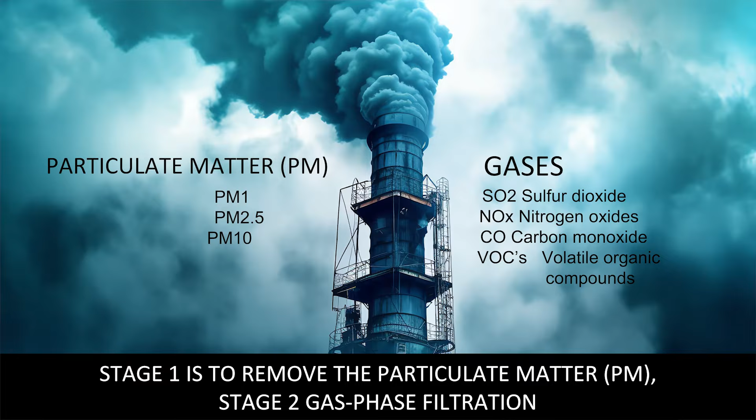With regards to air pollution, if I go down to the basics, we need to understand that there's two components in the smoke that comes out of those industrial chimneys. You have particulate matter and then you have the gases. Now, a lot of people are brandishing these terms around like global warming, climate change, greenhouse gases, and carbon capture. And while those are important and they are to be solved, we still maintain that the first primary problem is what is known as particulate matter.

Now, particulate matter is generally the stuff that you're going to visibly see. Now, that is step one. In our mind, there is enough scientific proof that you cannot solve the gases until we deal with the particulate matter. And that's what AirCure is about. That's our focus, to radically improve or reduce the particulate matter before we get to the gas phase filtration.

We believe in disruptive innovation. Disruptive means not just a new label, a new change, a little addition. We're talking about something that is going to be like candles to electricity, horse and cart to cars, film to digital, cell phones to smartphones. This is almost like setting fire to the existing in the hope of advancement.

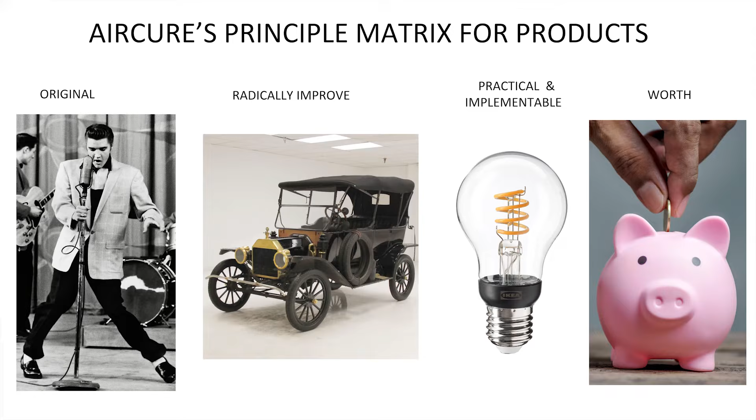That's what's called disruptive. AirCure has a product matrix that we try and filter all our products through. They need to be original, they need to make a radical change, they need to be implementable, and they also need to show their worth. If you can't do that, you're going to fail. So every one of our products goes through this matrix.

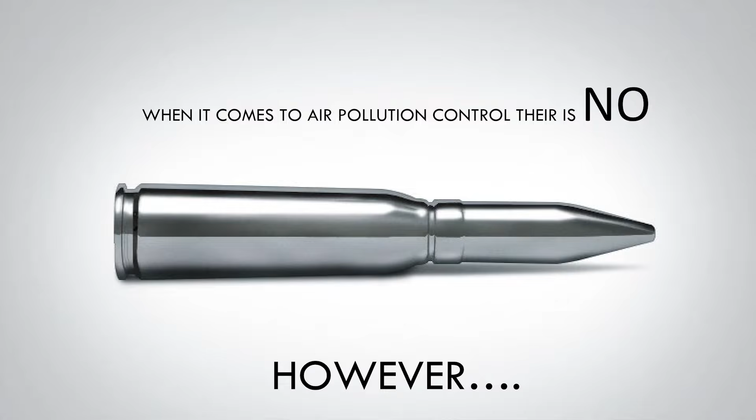When it comes to air pollution control, they say there's no silver bullet. However, we have 3 revolutionary products that we think are going to make a substantial difference. The first is called a Cycloduct, the second is Cyclo grit, and the third is Baghouse SC. The first 2 products are what we would call prefiltration, whereas the last product is a final filter, being the Baghouse.

What is prefiltration? In military terms, it's like sending in the troops. So the army, the Marines, etc., they take the hits while the king is in his counting house counting out his money. So as in chess, all the pieces are expendable, except we've got to protect the king.

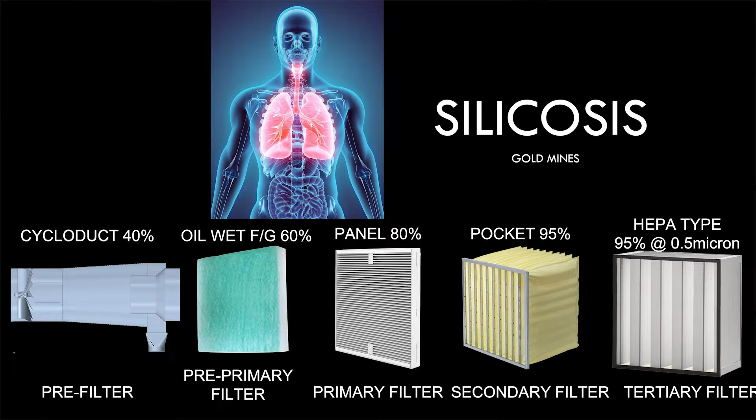We learned this years ago when we were developing filter systems for the mines. They had a terrible disease called silicosis, which is a lung disease from silica sand. And so we had this issue with really submicron sized particles getting down into the deeper parts of the lungs.

So when you design a filter system, you start with the end in mind. And the beginning of the process is to start with what we call a HEPA filter. Now that is a really expensive filter, and understanding that this is a working mine, it's hard to imagine putting in such an expensive filter. So we developed a multi-stage filter system where we had a pocket filter, a panel filter, and in front of that a fiberglass pad.

These were then set up so that they were the expendable parts while protecting the final filter. And we weren't getting the life out of the filters. So like all inventions, I have a wonderful saying that necessity is the mother of all invention. So very rapidly we had to come up with a pre-filter. We didn't invent cyclonic separation.

In fact, two scientists called Christian Huygens and Isaac Newton developed the idea of centrifugal force. And they said centrifugal force is the apparent outward force on a mass when it is rotated. So that's a bit above my pay grade.

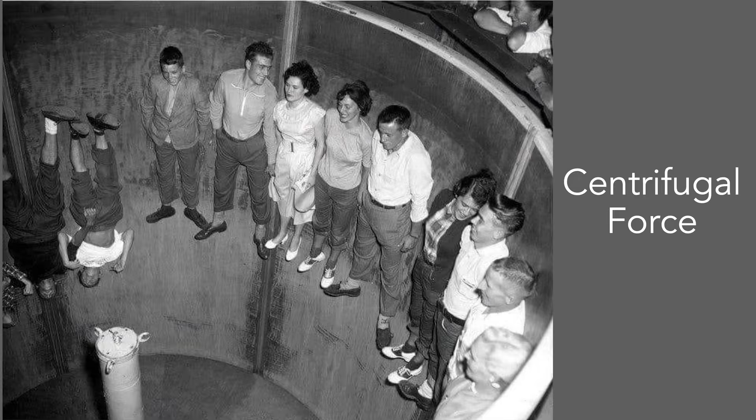And if I explain this, I go back to my childhood. I'm giving my age away, but any of you who are my age would have gone to the Rand Show in Johannesburg and found there was a ride, if you could call it a ride, called the rotor, which was essentially a big steel cylinder, and you all marched in, stood upright back to the wall, and it would start to spin, which was really fun.

And you would feel, as it went faster, the attraction onto the wall. And then they would take the floor away, which was highly amusing, and everyone thought it was funny as hell until somebody vomited. Then the audience thought that the rotor was amazing.

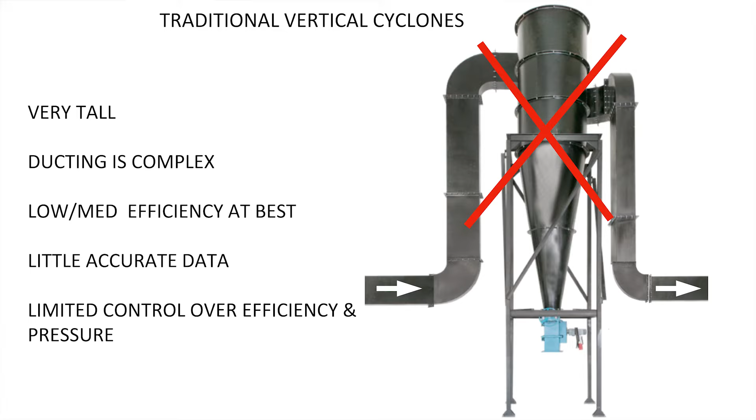The only cyclones that we could find at the time were tall vertical cyclones, and they were very tall. To duct to them and out of them was very complex. They had very little data in terms of pressure and efficiency, and they were low to medium efficiency at best. But because we were looking for a solution in mines, in the tunnels, they were disqualified on the first point. They were just too tall.

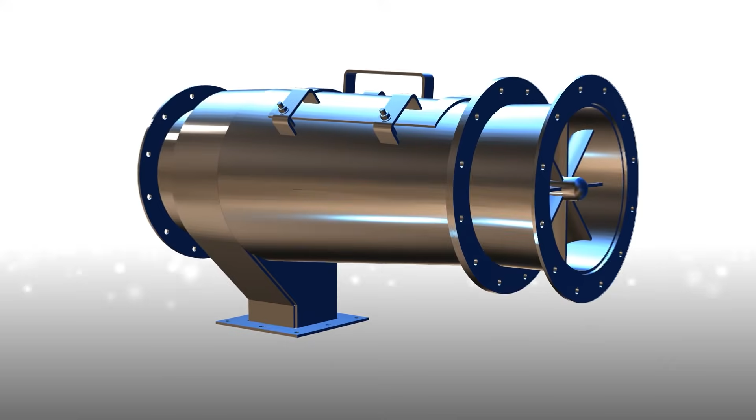Introducing the Cycloduct. This is a horizontal inline cyclone. It can be made out of any material and made to any size. It's a South African product. It's our product, and we patented this in about 70 countries around the world. Very simply, you would remove a piece of ducting.

This has three components. The one is the fixed blade. Now that creates the spin. So your airflow would go through our blade. It would then create the centrifugal force towards the outside. And then you have a vortex finder right in the center, which would then allow the cleaner air to go through and the heavier particle to drop out.

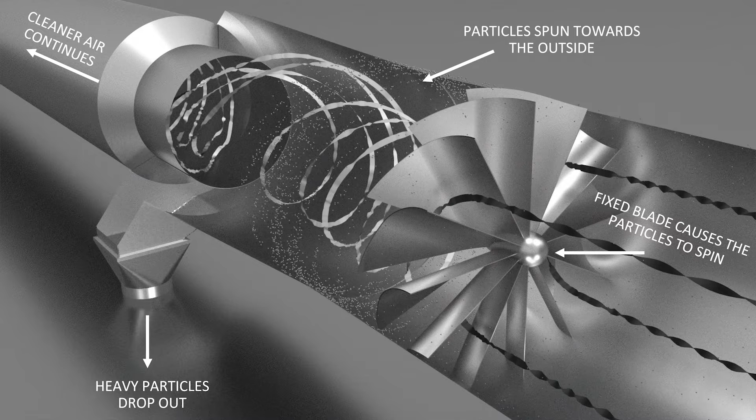As you can see from the illustration, it has a fixed blade. Now that blade has taken us something like 11 years to develop. And the pitch, the angle, the number of blades will determine the efficiency and the resistance that they create. So by changing the blade, we can determine the efficiency and the pressure drop across it.

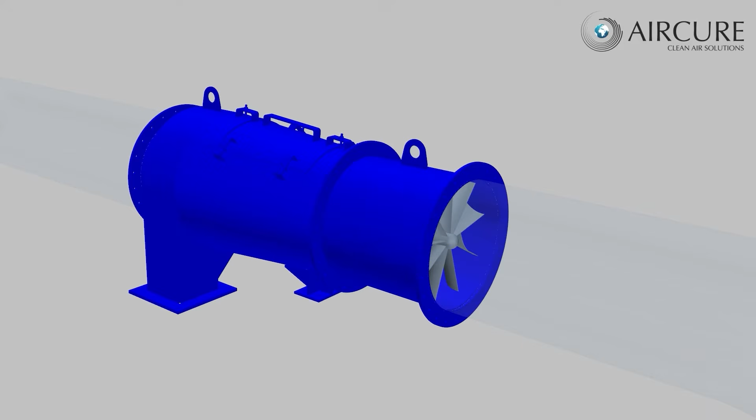The Cycloduct has an interchangeable blade, which if you choose, you could increase the efficiency by selecting a 6, 8, 10 or 12 blade. This would then give control over the efficiency plus the resistance that we can select. So we have a selection chart whereby you can easily interchange one blade for another.

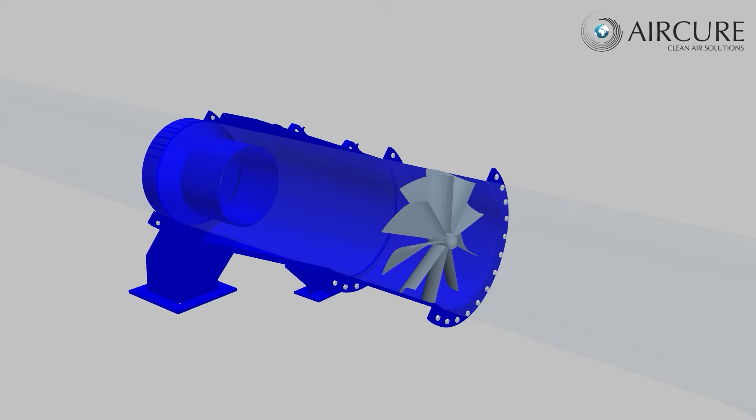Probably the best cyclone in the world. Now that's not just sales talk or me being boastful, but we've actually done extensive research around the world, and we've recognized that we have something absolutely unique in the Cycloduct. We don't build cyclones, we build smart cyclones. We can size them to any size. We can make them out of various materials. We can make them adjustable so we can set the efficiency and the pressure resistance. They can be retrofitted to virtually any filter system on the market.

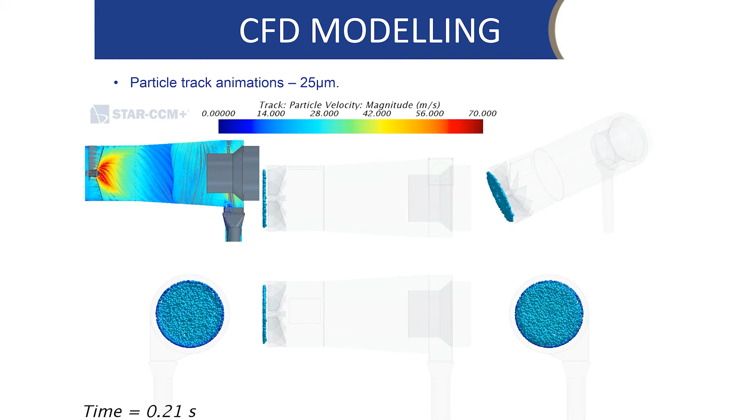And boy, have we tested them. We've tested them on CFD modeling. We've tested them in real life. And we have so many examples of just how effective these can be. CFD modeling is every product developer's dream. It's called computational fluid dynamics testing, and they essentially simulate what would happen in real life with a very high degree of accuracy. So you essentially put your product into their test bay on computer, and then you would be able to recognize what particle size you're taking out, at what velocities and what pressures.

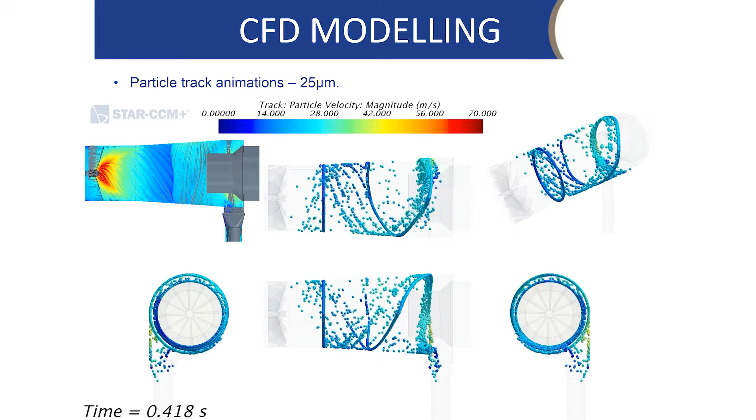And we've done up to now around about 35 different CFD models. First we did it for testing, then we did it for product development, and now we highly suggest that rather than make any product and sit on site and hold thumbs that it's going to work, we iron it out way beforehand and get the efficiencies right before we manufacture a thing.

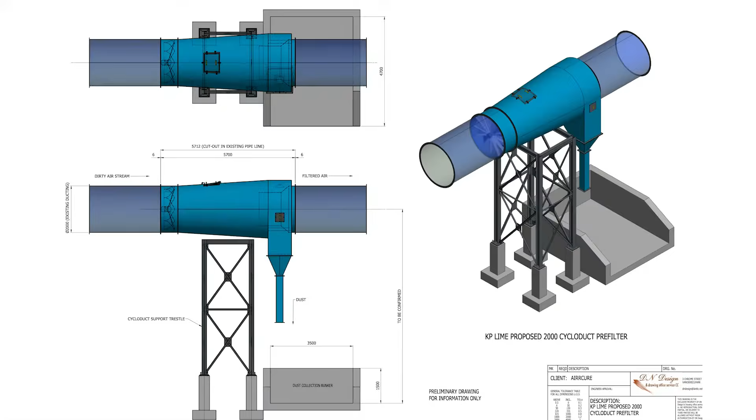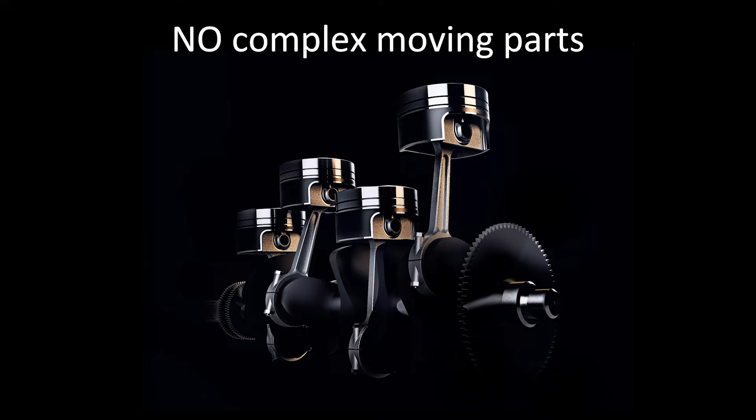As you'll see in this design, you could basically take a slice of ducting out and install this, but because this is 2 meters diameter and probably weighs about 6 tons, you would need a support structure. Some of the smaller ones you wouldn't, but in this case you would. Let me reiterate, no complex moving parts, and every maintenance guy goes, yay!

I coined a phrase, a filterless filter. Now, half of my staff thought I'd lost my mind the first time I revealed that statement, because we sell air filters. So nobody's ever going to accuse me of being a good businessman when I set fire to my filter business because I wanted to create the perfect cyclone. So why prefiltration?

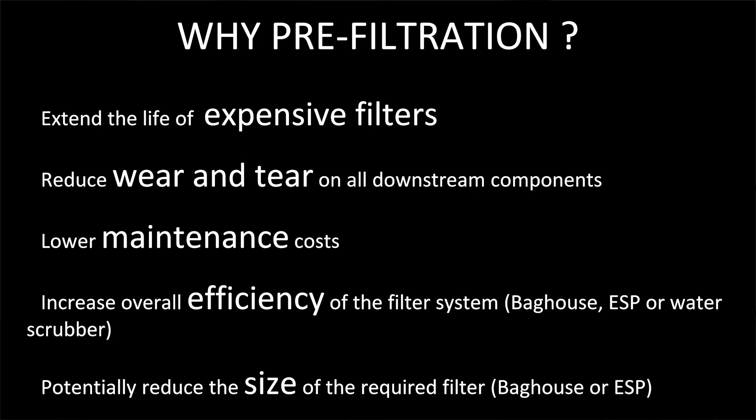Very simply, you can save on expensive filters, reduce wear and tear on all your downstream components, lower maintenance costs, and increase the overall efficiency of any filter system you have, whether it's a baghouse, an electrostatic precipitator, or water scrubber. Potentially, if you create a new system, it could be greatly sized down.

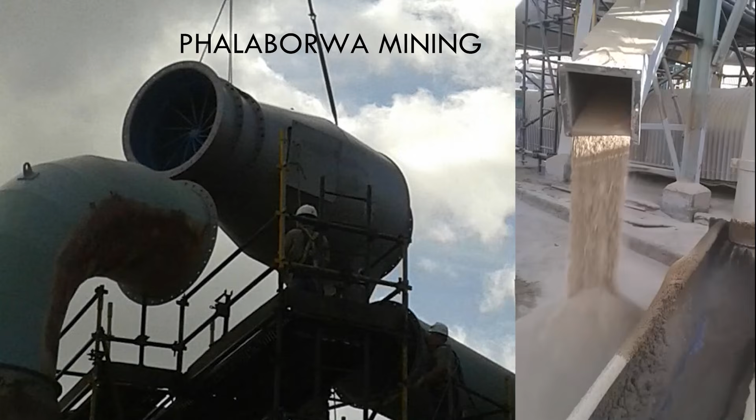While my filter division wasn't so chuffed, the mines were, because we greatly reduced the amount of replacement air filters on the units underground. But we sold hundreds of the Cycloducts, and they became the leading practice in all the gold mine tipping areas. This is a shining example of just how effective these Cycloducts can be. The amount of dust dropping out here is phenomenal, and that essentially would have gone to the baghouse.

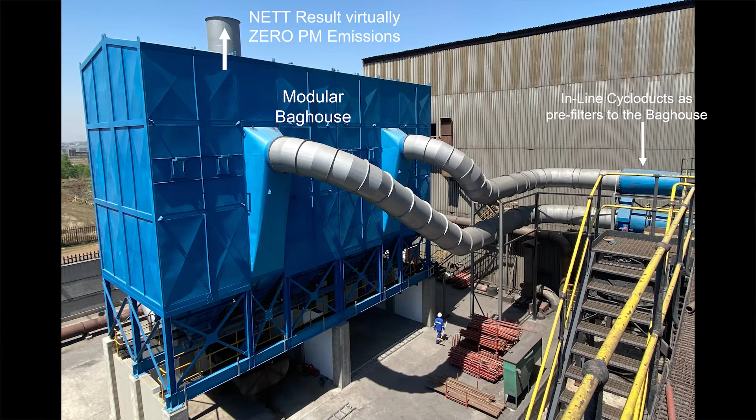We want to run through some of our latest projects with you. There's a company called Grinding Media South Africa, a subsidiary of Scaw Metals in Germiston, Johannesburg. They had in place a water scrubber using, if I'm right, about 1 million liters of water a month. They were using 500 kilowatt fans to drive the air. They had mud and slurry coming out the bottom. But the major problem they had was that they couldn't meet the particulate matter legal emission standards.

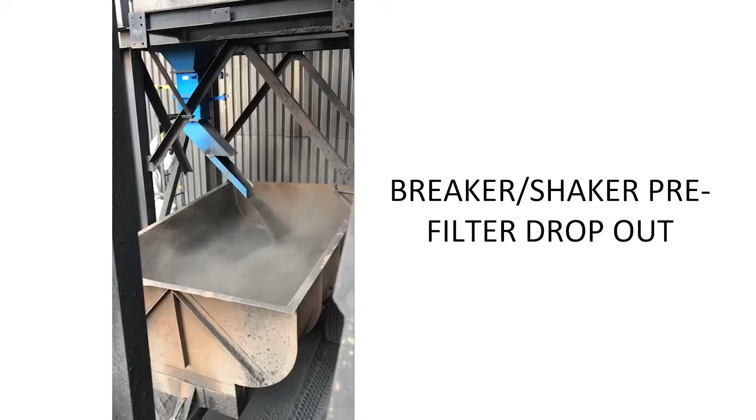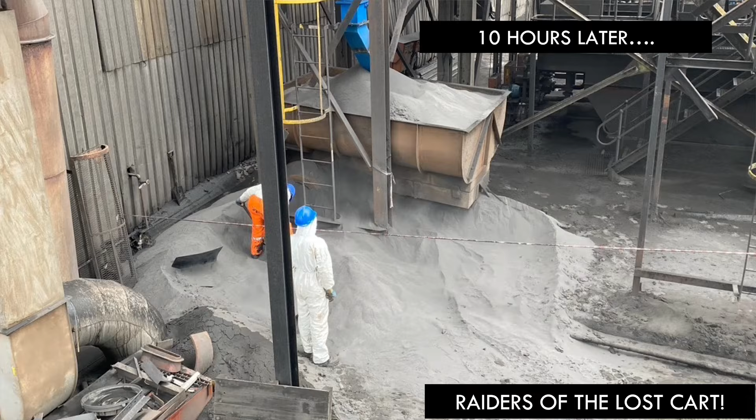We suggested they replace it with a baghouse, a modular baghouse. And in front of that, as a pre-filter, we installed these 1.5 meter diameter Cycloducts. By the morning, it was Raiders of the Lost Cart, and the amount of dust that had been dropped out by the cyclone surprised us all, but certainly we had to find an alternative way of removing the dust after that.

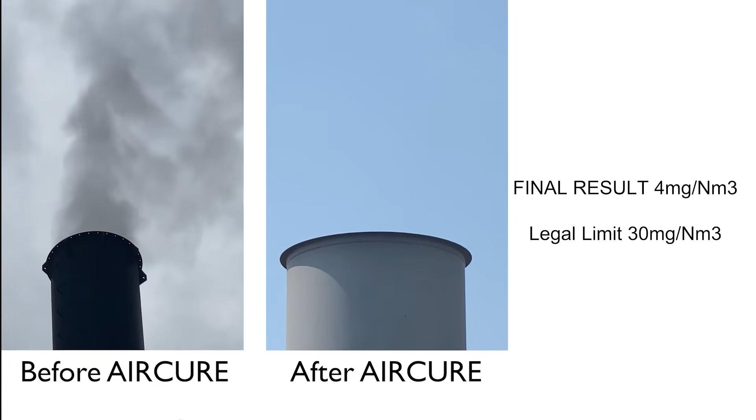The first picture is the original stack coming out of the water scrubber. The one on the right is after the baghouse, and we went from a legal limit of 100 milligrams. During the process, it was reduced to 30 milligrams. We actually achieved 4.

Sappi is a paper pulp manufacturer in KZN. They're all around the country, but they had 2 particular sites in the northern part of KZN. And they asked us a question: how far could we take cyclonic separation? It took 9 months of modeling to establish how we were going to use primarily cyclonic separation to remove about 96% of the particulate matter.

As this was the only filter between the boiler, the coal-fired boiler, and the stack, we needed to make sure that this was the most efficient cyclone we had ever made.

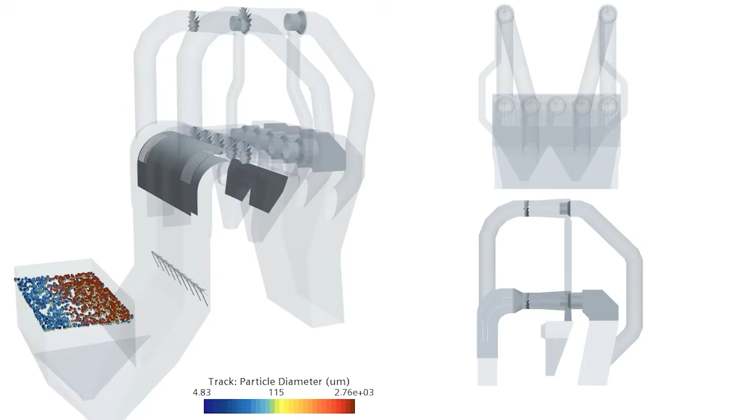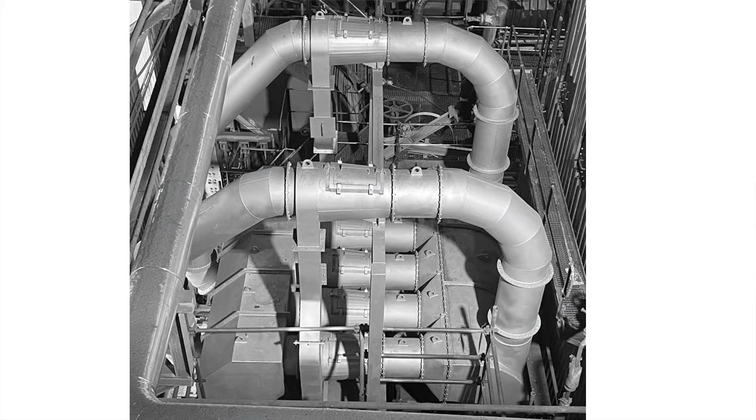In fact, it had 12 blades, and in order to assist the particles that had very little mass, the finer particles, we added a small suction to the base of the hoppers. We had very tight space constraints, and you'll see from the picture that we had 5 cyclones at the bottom and 2 at the top. That wasn't for just aesthetics, it was just because we couldn't fit them in any other way.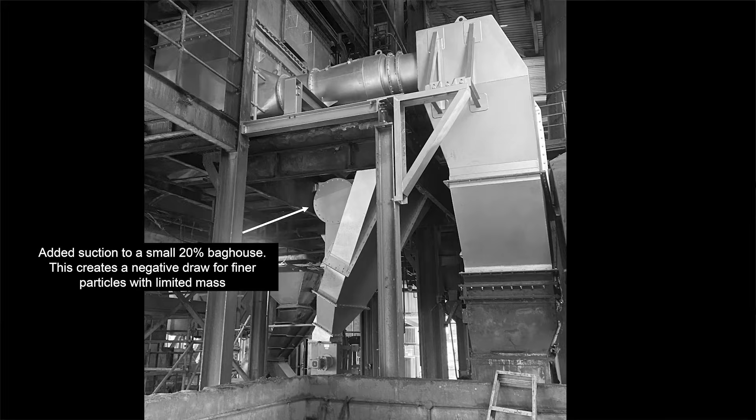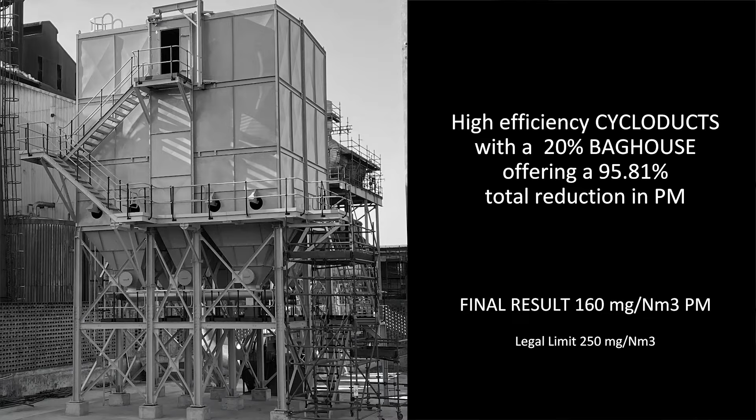As you'll see from the picture, below the Cycloducts you have a hopper where the heavy particles will drop, but we added that 20% suction, which was then taken to a small baghouse outside. The baghouse we installed was about 20% of what it would have been had we not had the Cycloducts.

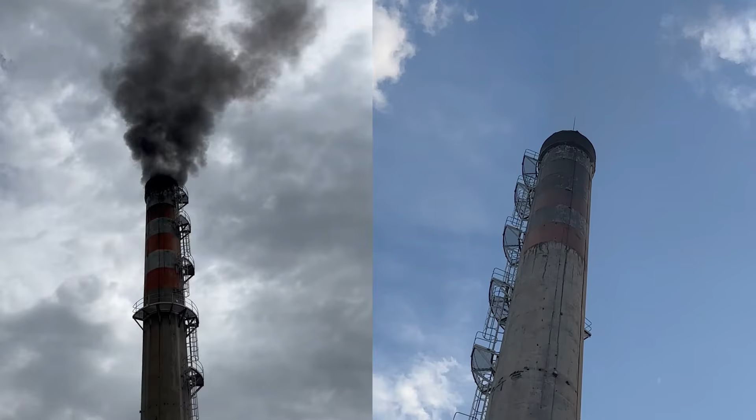This created the very first, I believe worldwide, where they have used prefiltration or cyclonic separation as the final filter, and we are so proud of the results. In fact, the legal limit was 250 milligrams per cubic meter, and we achieved no less than 160 milligrams per cubic meter. You'll see from the video how the stack emissions were absolutely immense, and post installation you can see it's chalk and cheese.

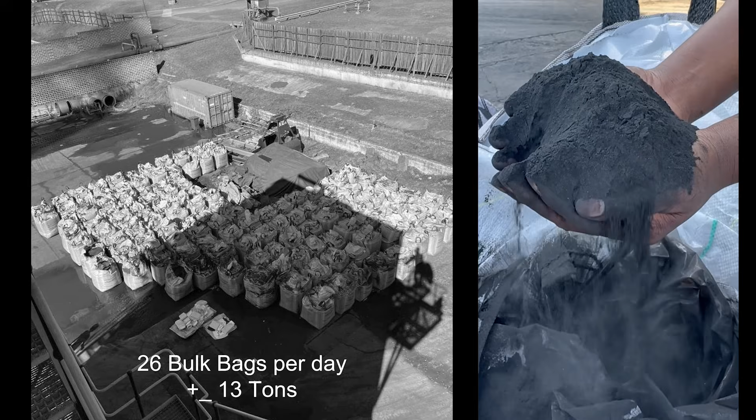Smoke is not smoke, it's actually particulate matter. And you'll see from the screen that we have about 26 bulk bags, and these are 1.2 by 1.2 by 1.2. Each holds about 600 kilograms of the finest powder you've ever seen in your life. That equates to about 13 tons of ash a day that is not going to the community.

We had a chance meeting with a Dr. Norbert Seifert, a doctor of engineering from Germany, who was in the country for a couple of days as a consultant on an upgrade of an ESP for Sasol. He'd heard about what we were doing with our Cycloduct and asked for a meeting. When we showed him what we'd been doing and what we'd achieved, he was quite intrigued.

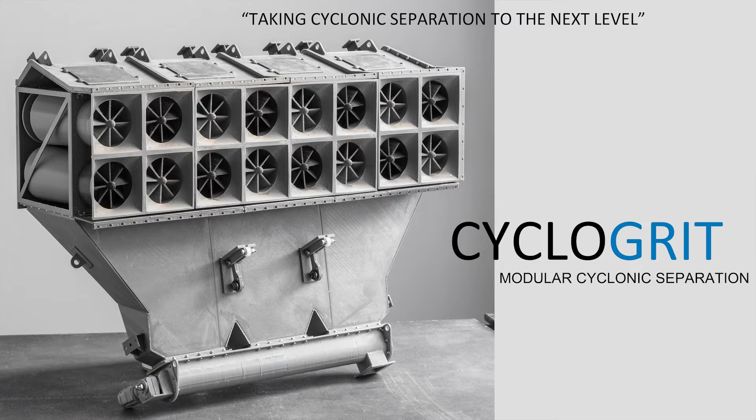He asked us if we had ever thought about making a bank of Cycloducts, given there was no space. We had a major space constraint, and he was looking for something that could slot into a rectangular duct. He then gave us 24 hours to come back with a design. Needless to say, we didn't sleep, but we came back with what we called 28 Cycloducts in a box. He was calling it a grit collector.

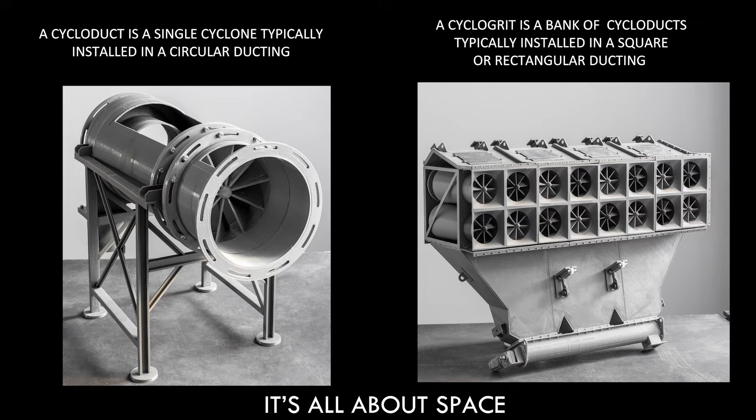A Cycloduct is a single cyclone system, whereas the Cyclogrit is a bank of Cycloducts. Dr. Seifert firmly believed that if he could remove about 40% of what he called the grit, it would extend or increase the efficiency of the overall ESP by removing some of the heavy particles.

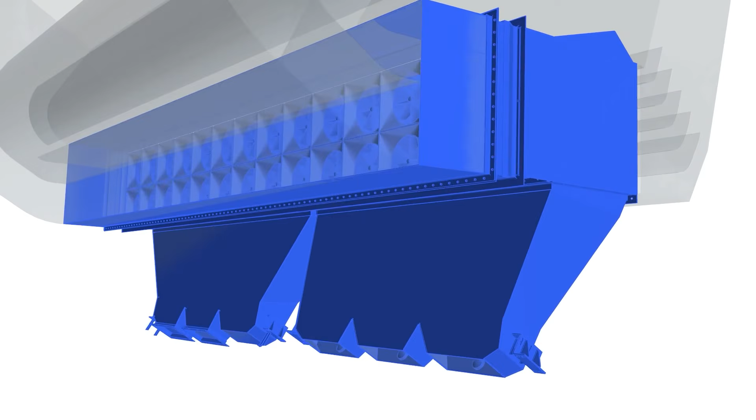The brief to us was to remove about 40% of the total ash, as they only had 600 pascals of additional pressure they could afford us on their existing ID fan. During the process of CFD modeling, we worked out every possible efficiency we could grab out of the system.

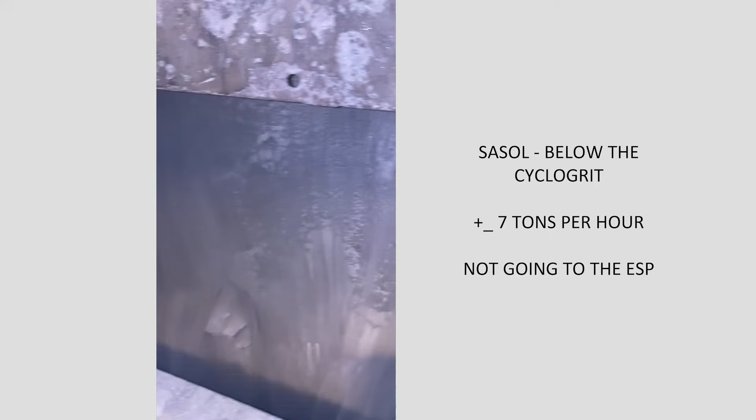We eventually landed on 56% efficiency at only a pressure drop of 450 pascals. The dropout is unbelievable. Understanding that this is just the dropout underneath the cyclones, which is about 7 tons an hour, that is not going to the ESP.

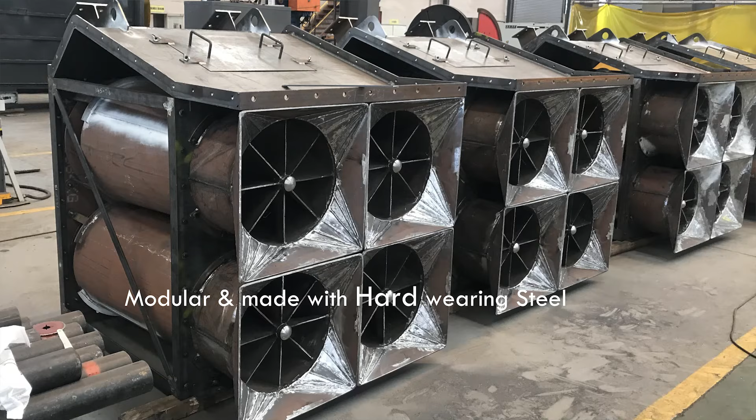The net result of the combined action of the electrostatic precipitator upgrade, which was conducted by the main contractor, we were the subcontractor on the grit collector or the prefiltration stage. In fact, the legal limit was 50, and combined we achieved below 40 milligrams per cubic meter.

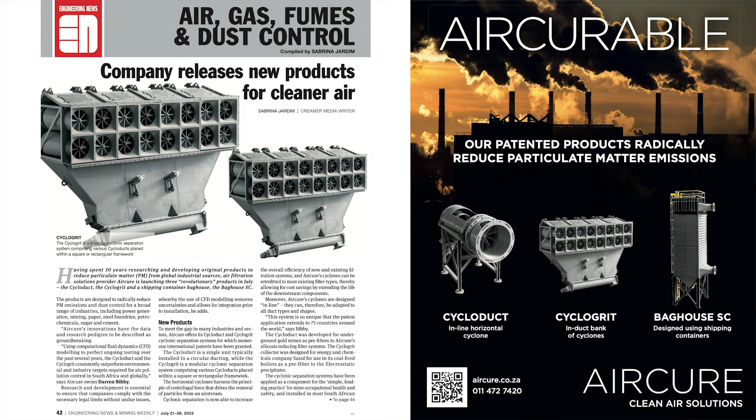We're so proud of these results that we published an article in the July 2023 Engineering News about all that we've been doing with cyclonic separation.

The third and final product is a baghouse SC. Baghouses we've been making for the last 25 years. It's the way we are constructing them out of shipping containers that makes them seriously unique. Here's our latest video of just how they work.

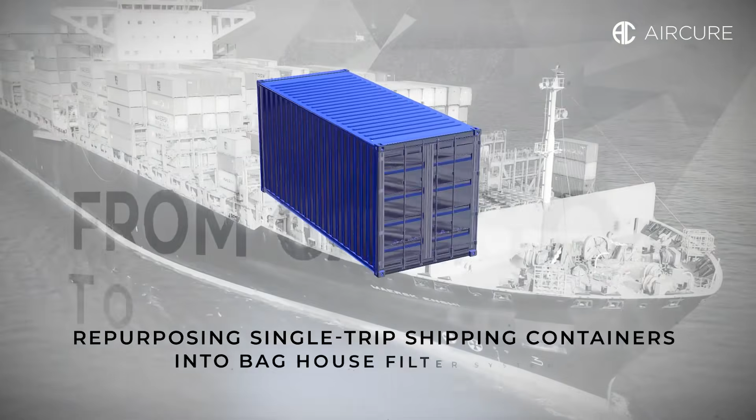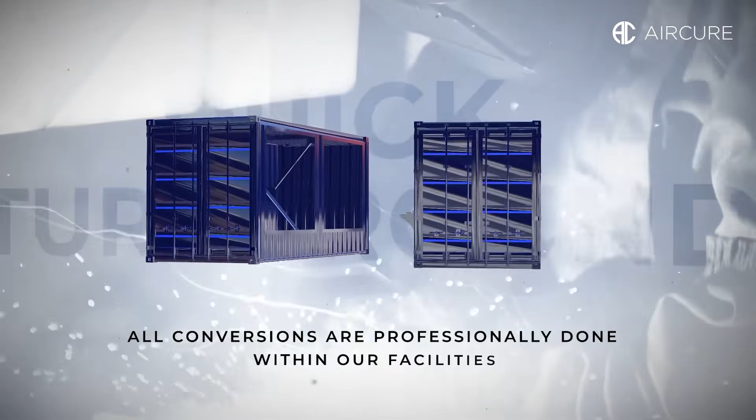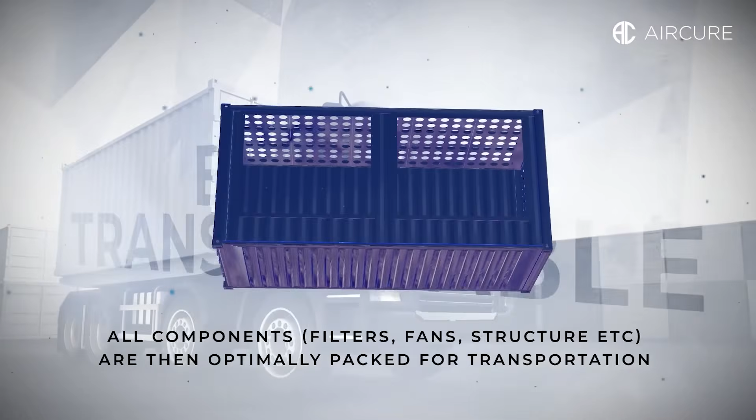Repurposing shipping containers into baghouses, taking a single trip, almost brand new, no rusty old boxes. We take them to our facility, where we do all the cutting, grinding, welding, turning them into baghouses before they leave the factory. They can then be placed onto road or rail transport and shipped anywhere in the world.

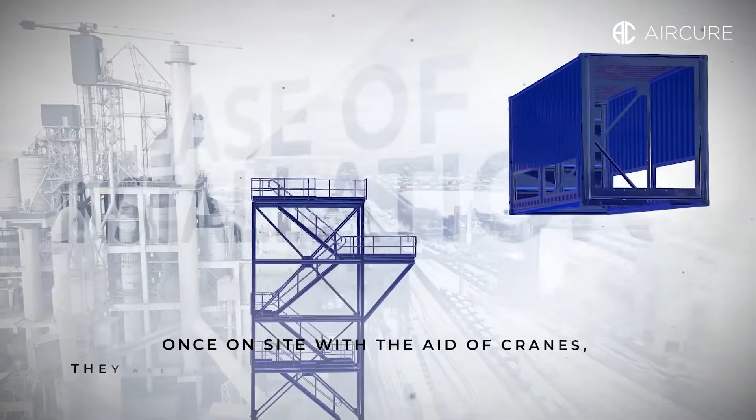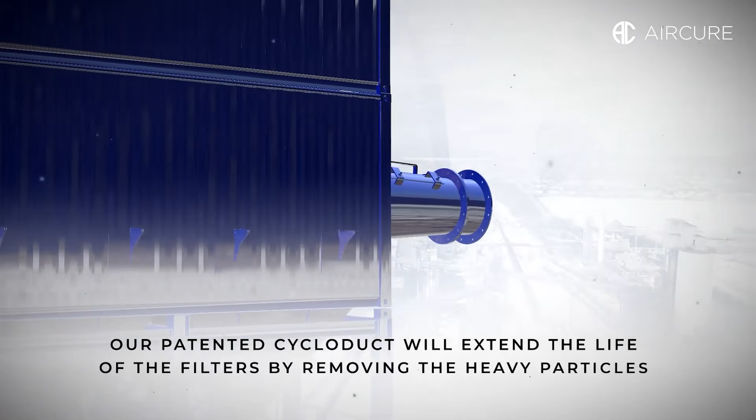All the components, loose fans, filters, etc., go inside the shipping container for transporting. With the use of cranes, this becomes child's play on site to assemble. We have a patented Cycloduct that goes onto the inlet, which is going to save and extend the life of all the filters inside.

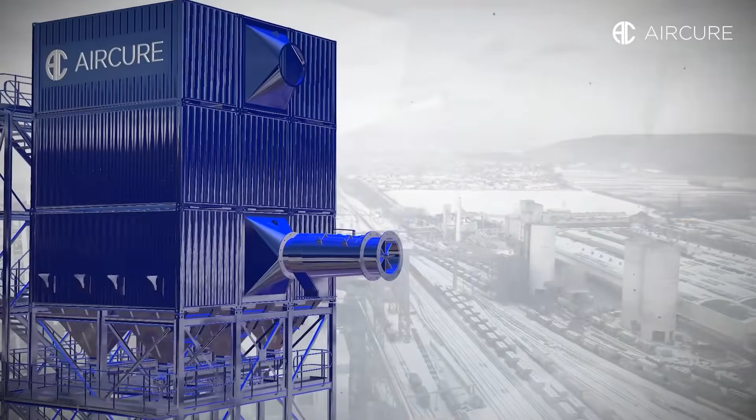The dirty air comes in, the clean air leaves to a stack, and you've got the simplest, cheapest, fastest, better solution. A baghouse in a box, literally like a piece of Lego.

Cheaper, better, faster. Sometimes when people say cheaper, faster, I'm worried about quality. But with a shipping container, you won't get better. These things are made out of Corten steel. They are meant to be put on the high seas, nine high, fully laden, and for 20 to 25 years they are bashed about. This is the strongest thing that we could ever believe to be used as a baghouse.

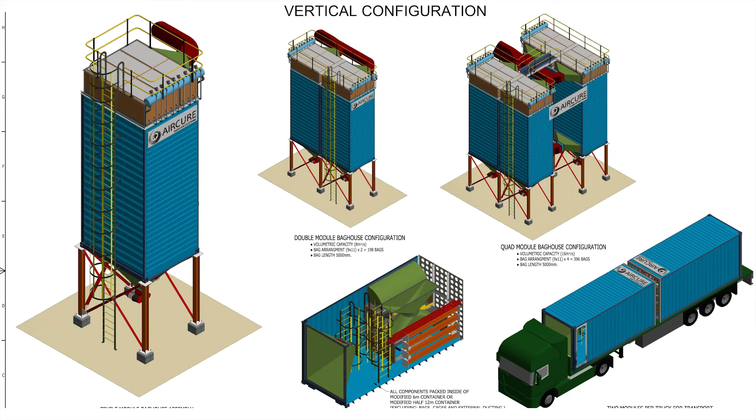We have a vertical option, and as you'll see, these can be grouped together. The other main advantage is that all the parts get put inside for transporting and then put onto trucks and sent to site. The horizontal version can use either 6 or 12 meter shipping containers, and we can build the structure as large as you require.

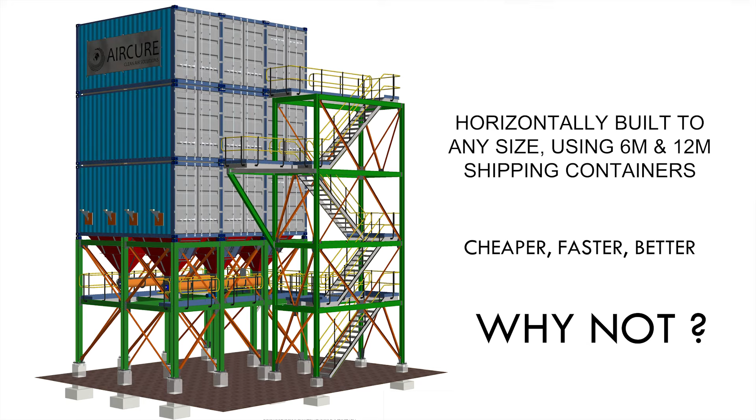The first baghouse we converted from shipping containers dates back to 2015, for a company called Rockfibre, a small to medium company who just didn't have the extra budget to meet the legal limits of their air pollution. I met with the owner, and at the time we threw an idea around.

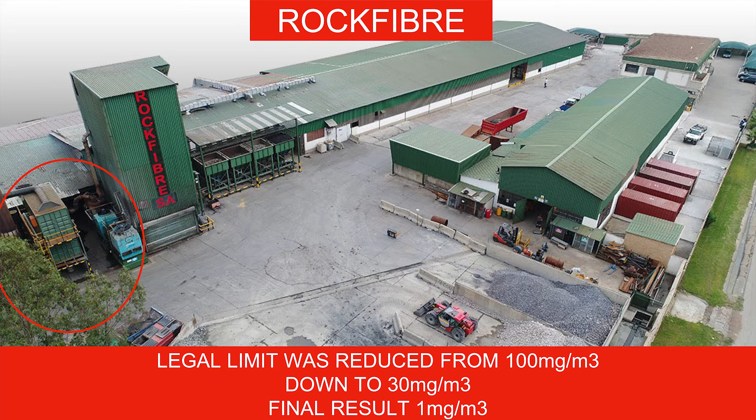Could we make a baghouse out of shipping containers? He liked the idea, it suited his budget, and it just so happened that the legal limit had moved from 100 to 30 milligrams mid-project. Yet we had nothing to worry about because we actually achieved 1 milligram per cubic meter, and for the last 8 years they've met that legal limit every year.

Here's the actual picture of the first baghouse that we ever made out of shipping containers. We published an article of our development in Engineering News in July 2016, just to prove we were the first men on the moon to develop a baghouse from shipping containers.

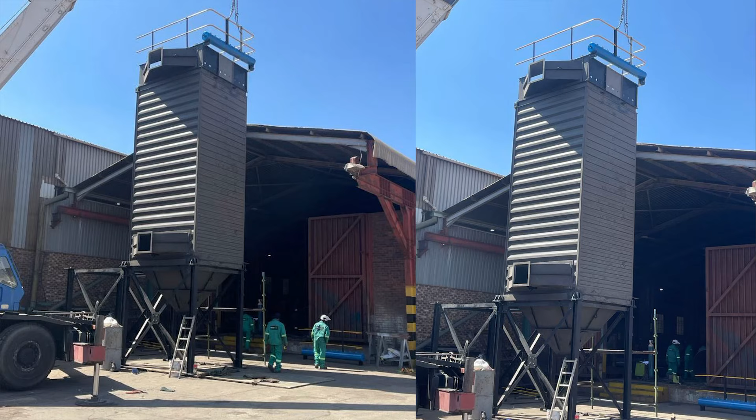One of our latest projects was a very small vertical, 8 cubic meter per second baghouse. What was interesting was that this was taken off the truck and installed in virtually 1 day.

Balancing the cost of air pollution control with trying to meet legal standards is really hard. We realized that air pollution control equipment is an absolute grudge purchase. Air pollution legislation is making it harder and harder for companies to get away with it, and the fear of closure or potential fines is a huge reality.

But that's not the reason we believe you should do it. The real reason to do this is because we believe it's the right thing to do, and because we can. We must change this picture. Blue skies for future generations.